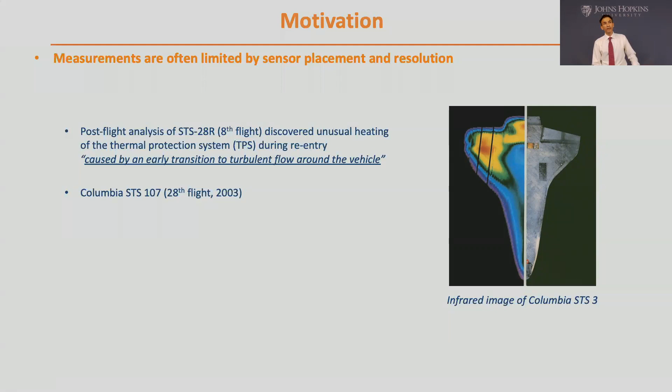Even in high-speed flows, even if you go to the lab, this is an example from an experiment at the Air Force Research Lab, where you have a cone in a high-speed Ludwieg tube, and this is a high Mach number. And what you might get from the experiment are just a few pressure traces along the cone. And this could be the only thing you get out of the experimental measurements. Perhaps you get some schlieren as well. And then given these measurements, you try to understand what the flow looks like.

Of course, the interpretation of the measurement could be as simple as saying, well, I see an organized signal here and a turbulent signal here. So transition happens somewhere between these two sensors. And if you have enough sensors, you can interpret it. But there's another perspective, and that's the one that folks from numerical weather prediction adopt. And that's that the signal is actually an encoding of the events that happened in the flow earlier. And if you can decode the signal, you can discover what takes place.

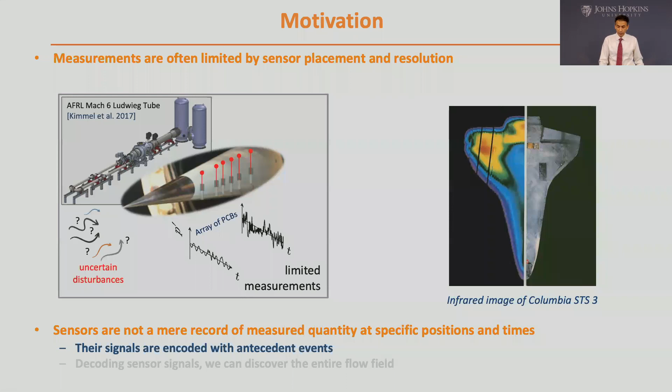And we've actually done this for the example that I'm showing here, where we can try to predict the environmental disturbances in the tunnel that we don't know. And once we have an estimate for them, we can predict the flow over the cone geometry and obtain model observations, compare them to the experiment, and continue to iteratively improve our estimate of the free stream condition until we can reproduce the measurements. Once we do, we have confidence that we're not just reproducing the measurements in our simulations, but we're in fact discovering the entire flow field. So that's the basic idea.

Now you could see applications in high-speed flows and in other areas, numerical weather prediction, environmental monitoring, interpretation of measurements and experiments. Why is this problem challenging, though? If it has such high impact, where does the challenge come from? Well, the problem is challenging because it's an inverse problem, and you're trying to find the state of nonlinear field equations from limited observations. And if the system is chaotic, any deviation from the true state will amplify exponentially. We know that. That's the butterfly effect that we all know very well.

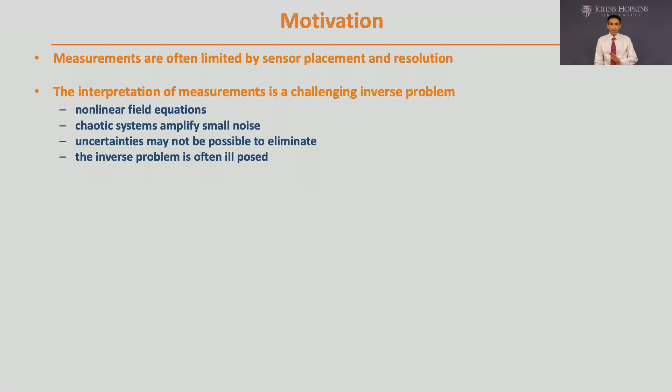How do you eliminate uncertainties? And how do you ensure that your solutions are unique? So I'll give you a very basic example, and that's the Lorenz system. Here we're showing a Lorenz system, which is in Fourier space described by three states.

X, Y, and Z. You can think of these as Fourier coefficients of the temperature and the stream function. If you start from some true initial condition, you are going to follow a trajectory, and we will observe one variable along this trajectory. We observe Y along the trajectory, and our observations are those blue dots.

This idea of chaos that we're very familiar with is that if, instead of starting at the initial condition, I only slightly perturb it, you can see that the trajectories diverge between the true, which are the gray trajectories, and red, my estimates of the trajectory. So I cannot reproduce the measurements. If the red is not overlying the gray curve, that means we deviate in forward time.

But when you're solving inverse problems, it's not just about being very good at predicting the initial conditions so you can reproduce the observation and trajectory. There's a lot more. In fact, in this case, we nearly reproduce all the observations and latch onto the trajectory for a very long time. But if you look at the initial starting point of our estimate, this is the truth here, and this is our estimated initial condition from solving the inverse problem. They're actually quite far. But even though you're far, you're reproducing the observations.

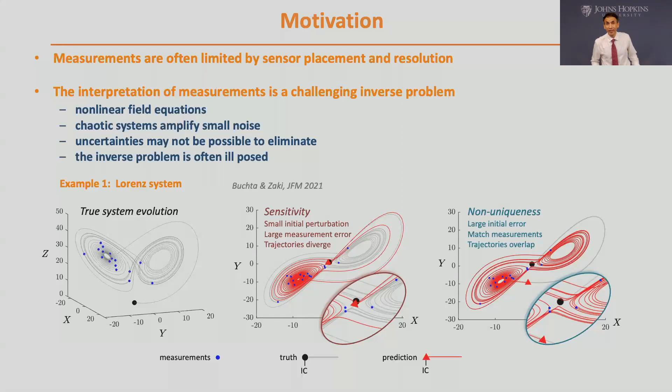Another example that we worked on is scalar dispersion. If you have a plume or a source of a scalar in a turbulent field, that scalar will disperse. And if you have a sensor downstream, that sensor will get a highly intermittent signal. If you only know the sensor signal, can you predict the location of the source? Well, your intuition tells you that this problem is very ill-conditioned.

In fact, if this were a laminar flow, you don't know whether the source is nearby and weak or far away and strong for a simple advection-diffusion equation. In fact, here turbulence is what introduces some sort of difference between the different source locations.

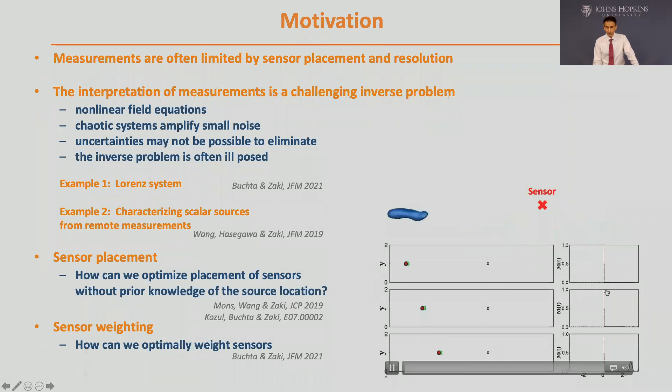To show you this visually, I've done a computational experiment where we have a fixed sensor location, and I put 3 sources further away from the sensor and change their intensity. You'll see the plume in this figure here, and a time trace of the sensor in this panel. The time traces of the three experiments look almost identical. That tells you that it's very difficult to find the true solution, because even small changes in the sensor signal can be due to significant changes in the prediction of the source location.

However, if you are able to solve this inverse problem, it really opens up a lot of opportunities in terms of understanding turbulent flows, and also to think about new enriching problems, such as how do you optimally place sensors? In this scalar problem, it turns out the optimal placement of the sensor is at the edge of a plume. If you're trying to differentiate different sources, you want to be at the edge of the plume, not immediately behind. You're not trying to maximize the sensor signal. You're trying to basically identify the edge of the plume, because that gives you a sense of how far the source is.

But there are mathematical ways to work on optimal sensor placement and optimal sensor weighting. If you have a network of sensors, how do you preferentially favor certain ones versus others? If you have scalar and velocity gradient, how do you weigh those two different quantities? So it's a really rich area.

Today, the focus will be on shear flows or wall-bounded flows in turbulence. So our basic question would be, what is the minimum resolution in the lab to be able to reconstruct all the missing scales? If I'm going to do PIV, for example, and of course today we're going to generate our data from a simulation, but if I were to do PIV and get these flickering lights, what is the minimum spatiotemporal resolution for which I can reconstruct all the missing information?

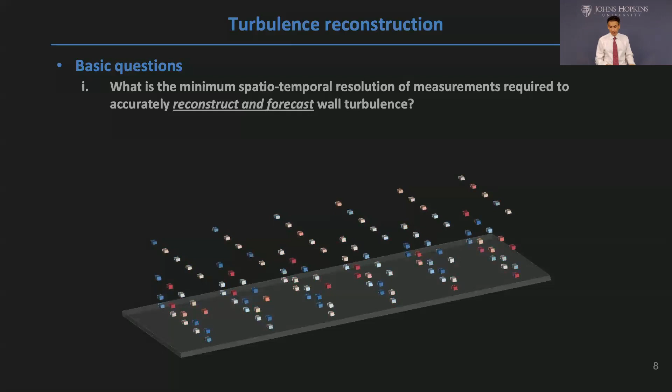And we're not interested in estimation of the information that is just instantaneous. We're interested in, one, a solution to the Navier-Stokes, and two, one that can give me a trajectory that actually follows the flow in the experiment as long as possible. So that's a very challenging task. We cannot just use simple interpolation, for example, or stochastic estimation.

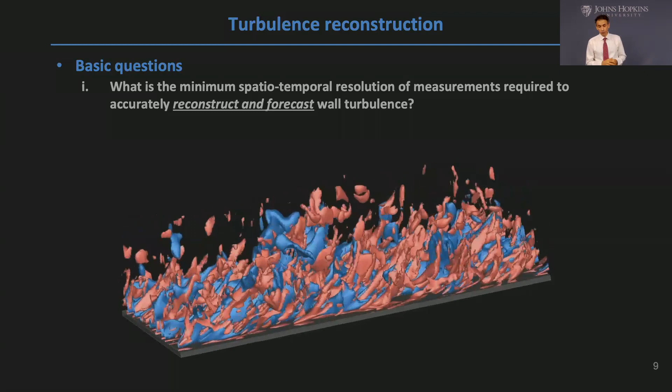We actually have to find a Navier-Stokes solution that can reproduce these trajectories. And then, of course, if we can answer this question, we can start playing games and ask, well, if I only have the outer flow, which experimentally we can measure without having to get so close to the wall, can I reconstruct the missing wall layer, which is very difficult and challenging to visualize or probe experimentally? And if I only have wall measurements, for example, that's what happens in engineering applications, how far from the wall can I predict turbulence?

And we start also discussing ideas about, if I have a single measurement, what is the domain of dependence of that measurement? What does it tell us about the nature of this inverse problem? And the approach we'll adopt is adjoint variational data assimilation. Folks from weather prediction will call this 4D-Var. And we'll first focus on turbulence reconstruction and then the idea of the sensor domain of dependence.

So we will first perform a numerical experiment and get surrogate observations. So our reference flow, that would be the experiment, we're going to call U superscript R. So whenever you see capital R, that means that's the reference state, that's the truth that will be hidden from us. And the truth satisfies the Navier-Stokes equations. And it's a channel flow configuration. And from this, we will extract some observations.

So script M here will be our measurement kernel. That's how we extract observations from the true state. And we'll extract these observations as a function of time. So as we perform this reference calculation, we're extracting observations at probe locations. And you can see this is ultimately the image that we have. And the idea is, can we see in between these flickering lights?

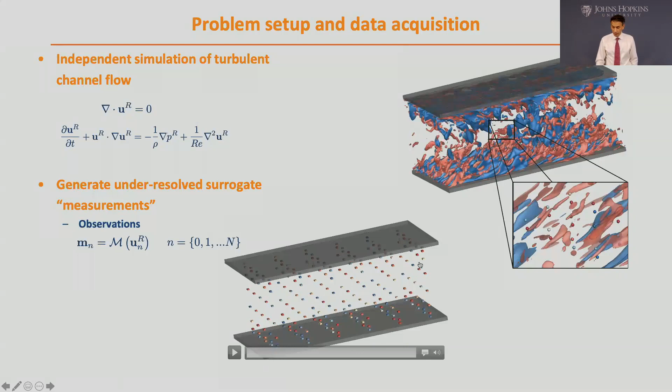So the procedure is the following. Once I've performed the experiment, I'm going to construct a numerical model of the flow. This model could be LES, it could be one-way Navier-Stokes, it could be PSE if you're interested in transition. For the purposes of today's talk, we're going to use Navier-Stokes. Our forward model is going to be called N for nonlinear Navier-Stokes equations. And if I have an initial condition for channel flow, I can predict its entire evolution.

Unfortunately, we don't know the full initial condition. This here is the control vector that we're trying to discover to be able to reproduce the measurements. However, given an estimate of U0, I can solve Navier-Stokes and I can collect model observations and I can compare them to the measurements. And I will define a cost function, which is the difference between my prediction of the observations and the true observations. So my cost function is the norm of this error term between my ability to reproduce the observations and the true observations.

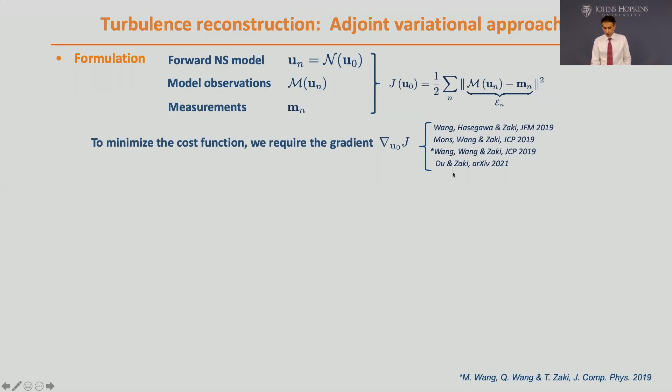The key, of course, to this minimization is to find the gradient of the cost function. And there are many different ways to do this. In our group, we've used adjoint methods, and that's what we'll do today. We've also used ensemble techniques and machine learning. So we have papers in all three areas, and we're currently doing a systematic comparison of the performance of the three.

So the idea of adjoint variational methods is that given an estimate of the initial condition, I can solve Navier-Stokes and collect my model observations. I can compare them to the true observations here and find the errors in my reproduction of these measurements. And that's E sub n. And I also have to store the forward velocity evolution, and we'll see why. Once I get to the end of the time horizon that I'm assimilating information, I solve the adjoint equations. So these are the dual to the Navier-Stokes equations.

And you can see the adjoint will be marked by a star. And you can see also that the adjoint Navier-Stokes equation on the right-hand side is forced by the disparity between our prediction of the measurements and the true measurements. So this disparity is what drives the adjoint equations in backward time. And at the end of adjoint marching, what we have is the gradient of the cost function. Once I know the direction of the gradient, how the cost function increases, I can move in the opposite direction and attempt to reduce the cost function.

And we do this iteratively. The reason for storing the forward flow field is because the adjoint equation depends on the forward flow field. So you have to store the forward evolution during your assimilation time window, and you use it in the adjoint system. So I'll show you results now from this procedure for turbulent channel flow.

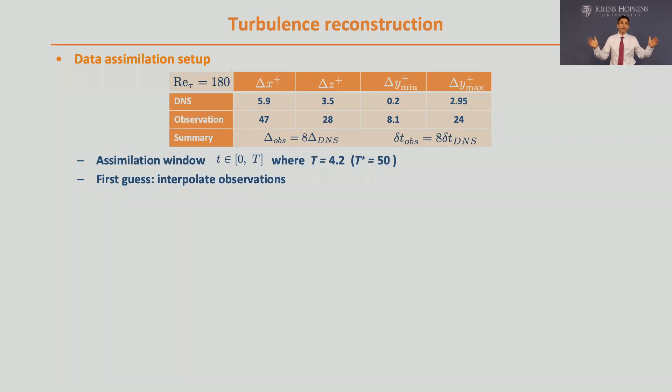The first example is from Re-tau 180, and we perform DNS. This here is the DNS resolution on the top row, and below it is the resolution of the first set of observations we'll look at. So as a first step, we said, imagine we cannot perform measurements at full resolution of DNS. We can only perform measurements that sample roughly every 8 times the DNS resolution. So delta X of the observation and Y and Z is 8 times what you would need for DNS. And in time as well, we're subsampled. Our assimilation time horizon in this case is 50 plus units.

And the first result that I want to show you is just visual, qualitative. This here is the hidden truth calculation. And below it is a reconstruction of the initial condition when the resolution is 1/8 in space and time. So 1/8 to the fourth is over 1/4000 of the true resolution. And if you play the 2 videos, you can see our ability to reproduce the reference flow. I will show this again. You can see our prediction of the initial condition. That's the objective, or the control vector that we're trying to assimilate. Our prediction seems reasonable. It has some high frequency noise, but as it evolves, it improves and latches onto the true trajectory and reproduces the experimental measurements.

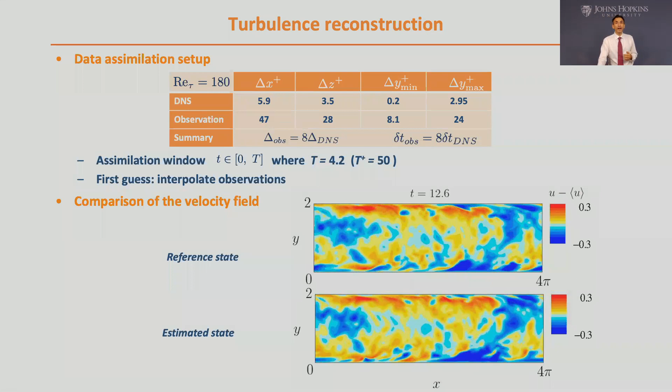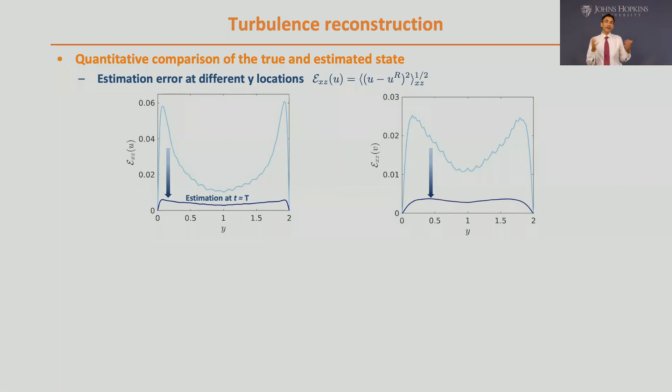We can quantify the error. We can integrate the error in the horizontal plane and plot it versus wall normal coordinate. This here is the error in the U component of the velocity as a function of distance from the wall at the initial time. So this is the error in the initial condition that we predicted, and this is in the V velocity. And as we march this predicted initial condition forward, you can see that the error decays. It doesn't diverge as you would expect from the fact that the flow is chaotic. In fact, the error decays. And there's an obvious question, why does the error decay? So we can plot the integrated error. I integrate the error in Y and plot it versus time, and you can see indeed it's decaying in time.

Well, the reason the error is decaying is because this forward adjoint loop is targeting the observations, minimizing the error in the observations. But which errors are most important in this loop? When you solve the adjoint equation, it is forced by the discrepancy between the true measurements and the model reproduction of these measurements. At the final time, the errors have an entire time horizon to amplify within the adjoint. But the errors at early times have a smaller duration being advanced by the adjoint. So if you think about this idea of dual chaos, or the Lyapunov exponent of the adjoint equation, you realize that the latest errors are the ones that have the longest time in the adjoint equation to amplify by the Lyapunov exponent.

And the target of this forward adjoint loop is to find the initial condition that reproduces the measurements, but it's really targeting the latest measurements. So if you wanted your error to be almost uniform in time, you can weigh the measurements and maybe have a decaying weight to say, actually, I want to also be able to reproduce early measurements accurately, and we've done that.

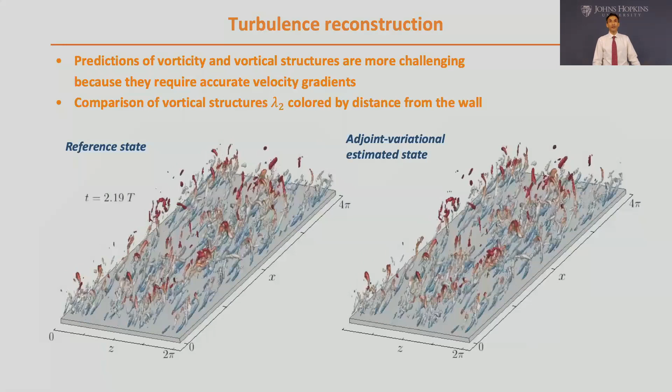But if you were to perform the data assimilation procedure, you get a richer picture. Again, it's noisy because we have all these high-frequency errors in the initial conditions. But as we march our predicted initial condition, you can see that we're capturing these vortical structures. How sensitive is our prediction to noise? If the measurements have some white noise, how well can we reconstruct the flow field? So here I'm looking at the errors in our prediction of span-wise vorticity.

And if I add noise to the data, 0% noise, that means I have perfect data that come from the reference calculation, and our error in the vorticity is this lowest gray line. And if I systematically add noise to the measurements, we added 5%, 10% noise, and you could see it's this line here. We're still less than 5% error. So the error in the vorticity field is lower than the noise level we added to the measurement.

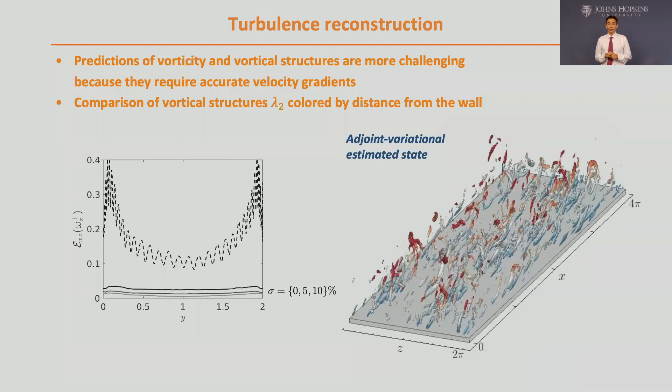This here is the error in your prediction if you use just simple interpolation. So you can see you have 40% error in vorticity if you just use the original observations and interpolate. So now we start thinking about, we can do this reconstruction, but what are the limitations? We only took 1/8 of the DNS resolution for our observation. What if I keep coarsening systematically the observation? What is the length scale that matters in our ability to reconstruct the flow?

So we systematically change the distance between span-wise measurement locations. And of course, at ZM is my measurement location. At ZM, if I compare my prediction and the true flow, they're very accurate because I have data on this plane. And we can see that because in color, I plotted the true flow, and with the lines, I plotted our estimation of this hidden truth. When the lines and the colors overlap, that means we've done a good job.

If I move away in the span from a measurement location and look at how well we predict the flow, now you can start to see that the lines and the colors are not aligned. It means our predictions are not matching the true flow. And we systematically change the distance between span-wise measurement stations and check how the error looks. So here we're plotting the actual errors, and this here is the distance between two span-wise locations. So if we're only measuring every 112 plus units in the span, or 56 or 28 or 14. So we're progressively bringing the measurement stations closer together.

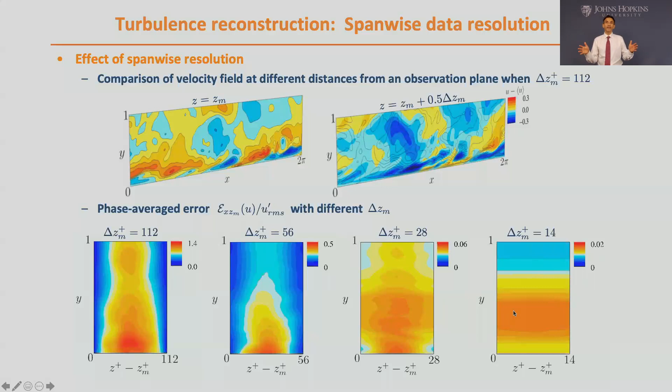And you can see when they're far apart, the error, of course, is lowest at the measurement location, increases, and then decays again. And here, this is very large error. This is 140% error. But of course, as you bring them closer, your error drops. We're down now to 2% errors. And it's homogeneous because the stations are close together. But what is the critical resolution?

Well, we can plot a correlation between the true flow and our prediction. So this is the lower correlation here. At the measurement station, the true flow and our prediction are perfectly correlated. And as I increase my distance from the measurement station, the correlation, of course, decays. My prediction of the true flow becomes poor as I move away from the measurement station. This figure, of course, reminds us of the two-point correlation, but they're not exactly the same. Remember, in the two-point correlation in turbulence, we take a reference point and move another point away from it and see where the flow decorrelates.

But the point of plotting these two together is to tell you that even though the turbulent structures, for example, at y plus 17, have entirely decorrelated by 28 plus units, the correlation is 0. My reconstruction of the flow 28 units away from the measurement station still is correlated with the true flow by 50% correlation. Again, if you go higher up at y plus equal 51, the flow decorrelates by 56 plus units. But if I'm 56 plus units from the measurement station, I have 50% correlation between my prediction and the truth.

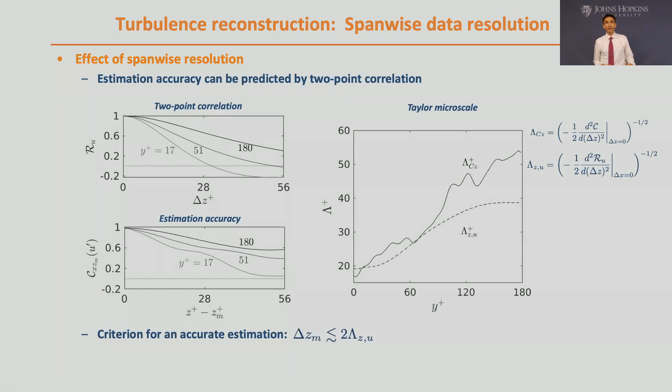So once you look at the correlation, it tells you, okay, you can from here get a length scale. And this length scale is a Taylor microscale that tells us basically the decay rate of your correlation. And you can see here, this is our Taylor microscale versus height. And this curve is the Taylor microscale. And this here is the microscale that we define that says, if your spacing between measurements is smaller than this lambda c, you can reconstruct the flow accurately. And you can see that they are similar values.

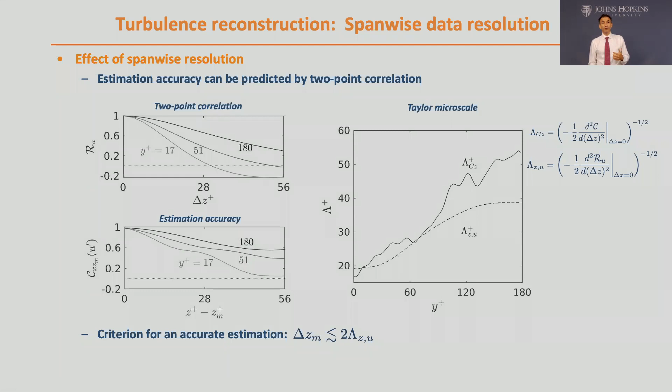So the argument here is that if the measurement stations are within a Taylor microscale, you can accurately reconstruct the missing information. And by accurately reconstruct them, we're not just using a correlation, we're looking at the flow being correlated with the true state above 90%.

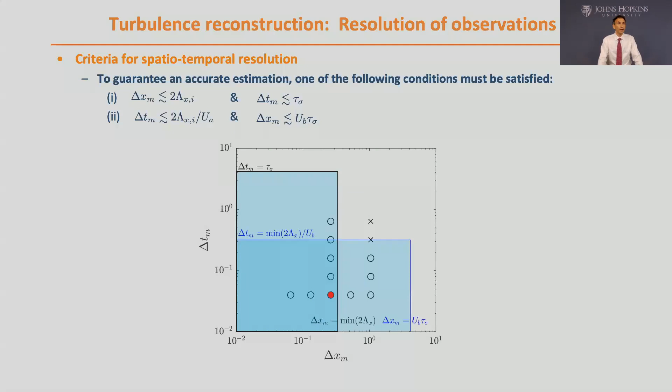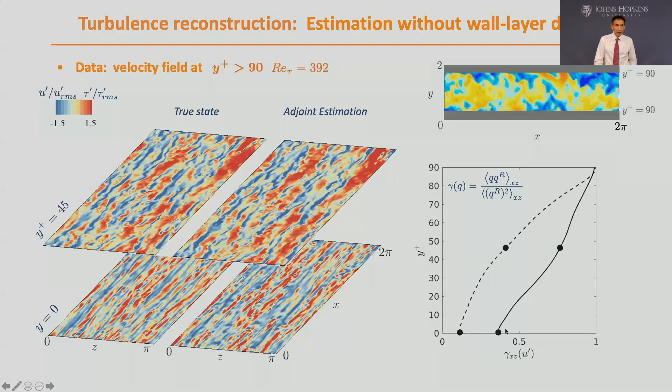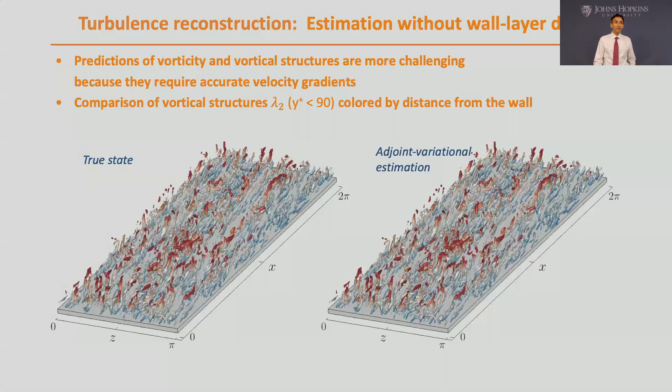And then we went to the biggest challenge, and that's just starting from wall observations only. There's nothing else. We only have information here at this red line, and the channel is entirely dark. How far from the wall can we actually predict the flow? So now we have to change our cost function. It's now the stress at the wall. That's the information that we have. And we try to reconstruct the flow.

So this is the true state, and this is our estimation. And you can see here, we're very close to the wall at y plus is equal to 15. We can reproduce the true flow. And our correlation coefficient with the truth is close to 1 at y plus less than 10; at 15, we're maybe at 90%. And you can see there are many curves here. These are Reynolds numbers from 100 to 590. So we've done this exercise for many Reynolds numbers.

And then we move up from y plus 15 to y plus is equal to 100. At this point, you see the correlation has dropped down to about 60%. We're still getting some of the larger scale motions, but the finer scales are more difficult to identify. And then we go even higher. This is y plus of 300. And then we're basically only predicting the large scale motions. We're not predicting anything else.

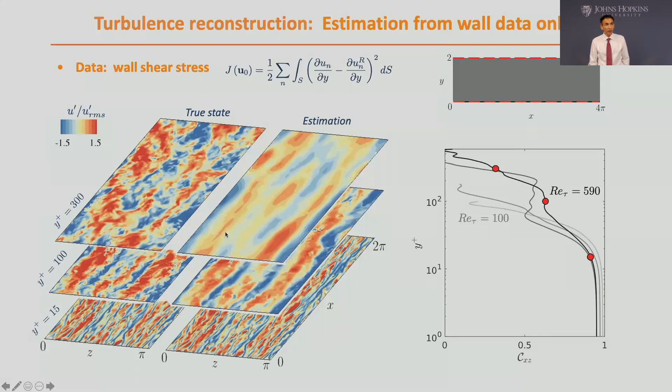How well is our prediction near the wall? We look at the true state and the estimated state, and we have interest in strong ejections and sweeps that happen near the wall and the associated high stresses and low stresses at the wall. We've written a paper with Greg on the Lagrangian stochastic behavior of vorticity, or Lagrangian stochastic Cauchy invariance for vorticity, about these events. And you can see the true is in black and our reconstruction is in gray, and the vortex lines are perfectly reconstructed.

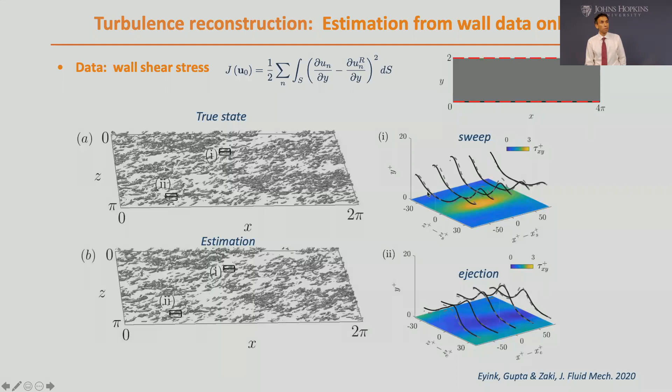Every measurement, what's the domain of dependence of that measurement? How does it affect the cost function? What is the shape of that cost function? So all these questions are the focus of the second half of the talk.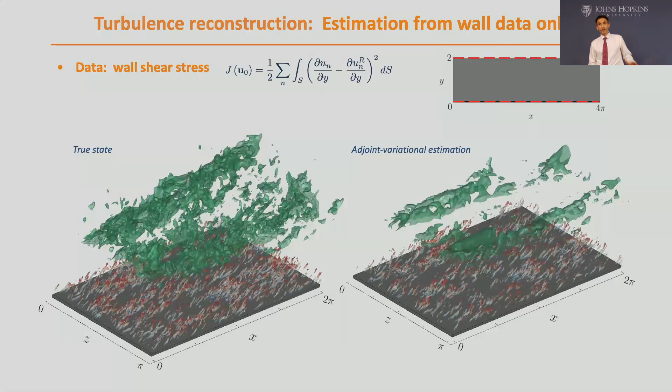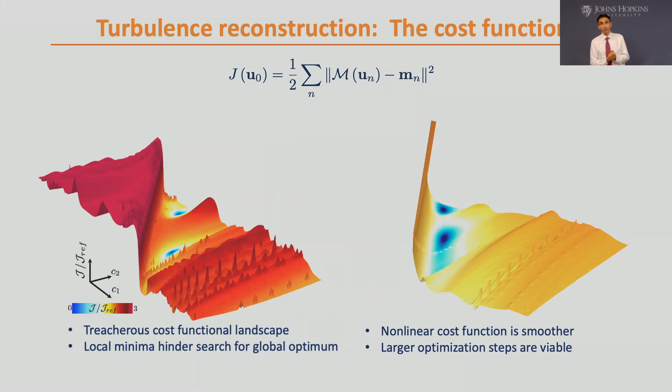If I weigh the measurements, the cost function will change. And you want to have a sense of what the cost function shape looks like. You can see it's a treacherous landscape and it's full of local minima and maxima. If you change your measurements or if you weigh them, you can change the shape of the cost function. This here is an example where we weighed the measurements to be able to favor ones that give you a

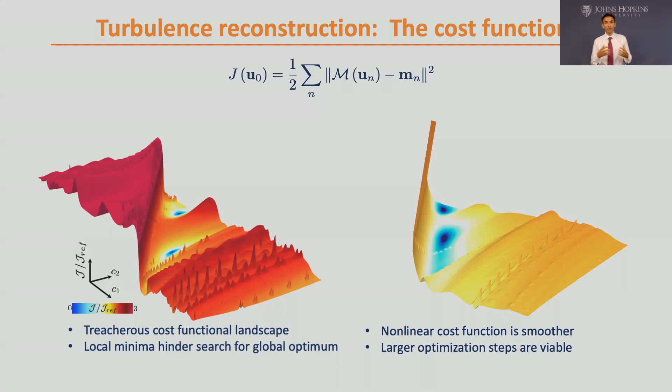smoother landscape. But before you do any of this, you first have to understand what is a measurement kernel, or what is the domain of dependence of an isolated measurement, before you get a sense of what the cost function looks like. So the second half of the talk will focus on this landscape of the cost function.

So if we think about these wall measurements and how we can interpret the flow field, the cost function is a measurement of the shear stress at the wall, so du/dy, that I am predicting from my estimated initial condition, versus the truth. And if these are far apart, then the cost function would be large and we're trying to drive it to 0. So the convergence depends on the landscape of this cost function.

And we want to understand that landscape, but where should we try to understand the landscape? If I put the initial condition anywhere, it's not necessarily a clear indication. Your choice of initial condition could be arbitrary. It gives you the landscape only at that location, and my initial guess and yours might be different. So it's instructive actually to look at the shape of the cost function at optimality. If you're so good that you're approaching the optimal, or you're even right there, what is the shape of the cost function there?

This also simplifies the problem because at optimality, the gradient of the cost function is 0, and the only thing we care about is the Hessian, the curvature of the cost function. And if you have a cost function which is essentially flat, that means your Hessian has practically no curvature and it's very difficult to invert, and you won't be able to necessarily identify the optimal. The system is very ill conditioned near the optimal. And if you have high curvature, that means you have strong sensitivity near the optimal, and your adjoint variational algorithm will drive you towards the optimal.

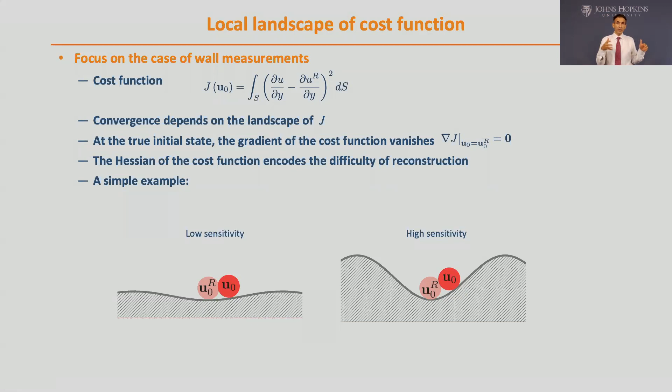So because we're going to look at the location of the optimal, this really simplifies the problem in very nice ways. Instead of looking at my estimation minus the truth, I can define a perturbation U prime, which is the difference between those two. And I call it an error or perturbation because we are at the optimal. I can linearize the equation around the optimal, and I can find that U prime, the deviation from this reference flow, is governed by the linearized Navier-Stokes equations.

So if I start with an initial perturbation, I can ask myself, how does it evolve? And it follows the linearized Navier-Stokes equation. So this perturbation will evolve according to the linearized Navier-Stokes and tells me how the cost function is going to change. Note that the forward Navier-Stokes, even if it's linearized, still has the true forward flow, which is a fully turbulent channel flow and chaotic. So we haven't thrown out chaos.

If you look at the evolution of U prime in this video, we start with U prime, which is random noise, and you can see it evolves. We are multiplying it by e to the minus lambda t, and lambda is a Lyapunov exponent. So to keep it order 1, we're multiplying it by this decaying exponential, because in reality, its energy is growing like e to the 2 times the Lyapunov exponent times time. So chaos is still there. This U prime is still chaotic. So your forward butterfly is still there,

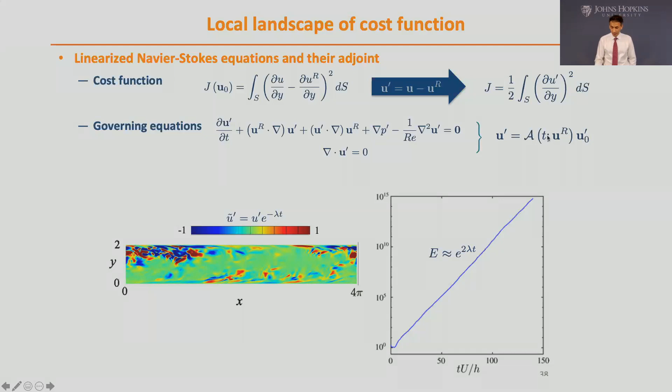here in linearized form. And then if I have a perturbation, I can compute how the cost function changes. We know the gradient is 0. I can compute the Hessian by taking successive perturbations and compute the Hessian of the cost function.

So in reality, if I want to figure out how the cost function changes, what I would do is I will take a perturbation to that true state, and I solve Navier-Stokes as I just showed you, the linearized Navier-Stokes, and then I will extract measurement from the outcome. The outcome is U prime, and I take a measurement, and that gives me du prime dy.

This is a very expensive process. For every possible initial perturbation, you have to solve the linearized Navier-Stokes and take measurements. This procedure would be very costly. You have to perturb U, V, and W, and pressure at nx by ny by nz points to be able to compute the Hessian of the cost function.

Or you can recognize that you just can take the adjoint. So you move A from here to the left-hand side of the bracket. So now we have an adjoint equation, adjoint linearized Navier-Stokes, acting on the measurement kernel. So this here is the measurement kernel. This is the shear stress computation, the d/dy at a point. And the adjoint field that comes from that is U star.

Once you have this adjoint field, so we start with the measurement kernel, M, and we solve the adjoint equation, A star times M, that gives me U star. This adjoint field, you can compute it once, and for any initial perturbation that you can dream up, you only have to compute a dot product, and you can find the cost function, or du prime dy, which is your cost function.

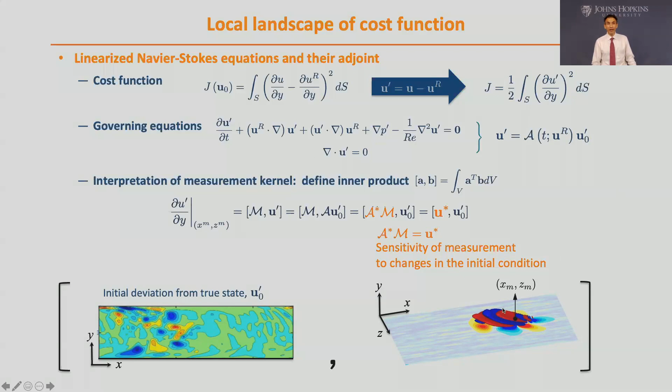So the adjoint field is really the domain of dependence. The adjoint field starting from this kernel is the domain of dependence of your measurement. What's beautiful about it is we've computed it for different Reynolds number for shear stress measurement at the wall, and we compute this adjoint field at different backward times, and you can see it's spreading and growing. It looks like a spot, a turbulent spot. Those of you that worked in transition would know this, that is spreading in backward time upstream.

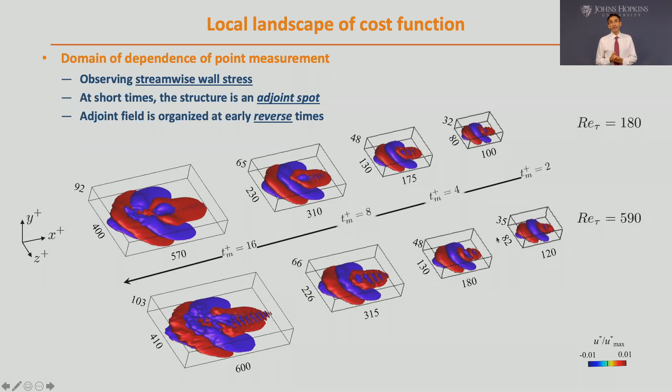So this measurement was affected by a small region earlier in time, a bigger region upstream earlier in time, and even further, it's a bigger region. And if you compare different Reynolds number, you can see the similarity between the adjoint fields in plus units. So the plus scaling, viscous scaling still works in the adjoint field.

You can compare the adjoint field due to measuring streamwise stress, spanwise stress, or pressure at the wall. And you can see that, for example, the streamwise stress, this is the U adjoint field. So if I have a positive U perturbation here, it will have a positive impact onto the streamwise shear stress. But here you can see the spanwise shear stress, a positive U perturbation or a negative U perturbation on the other side of the sensor will both have the same spanwise shear stress at the measurement location and measurement time.

And you can see the adjoint pressure is larger, which is consistent with our view of the pressure being non-local. So you can see the domain of dependence of the pressure sensor is larger than that of spanwise or streamwise shear stress.

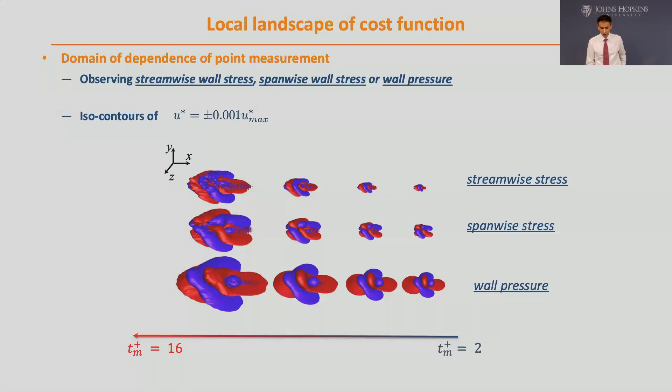So how do we get to the Hessian from here? Well, now I can rewrite my cost function in terms of this expression that we just derived, the adjoint field times any initial condition. So now I can take the gradient and the Hessian of the cost function with respect to U naught, the initial condition, directly. I don't need to do forward calculations and take measurements to figure out how the cost function that depends on the final state is sensitive to an initial condition. I can now directly take the derivative with respect to the initial condition, and you can take it twice,

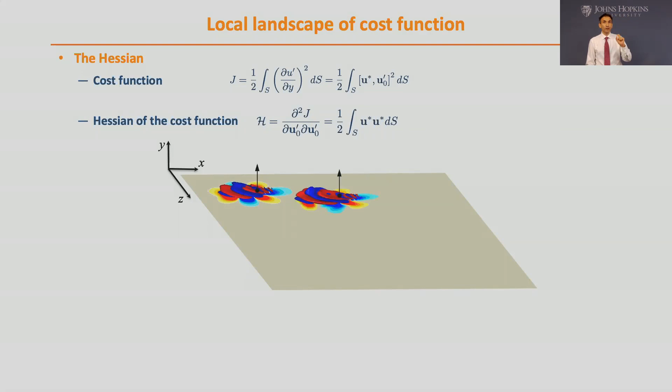and you can find that the Hessian is actually the cross correlation of the adjoint field. So it's this matrix, which is U star, U star. People in control theory will also call this the observability gramian. So I can compute it since the wall is homogeneous in the streamwise and the spanwise direction. I can do this kernel calculation at different positions along the wall, and I can ensemble average them, and I can find the ensemble average Hessian, and that would be U star bar.

And because also of homogeneity, I can take advantage of Fourier transform, and I can write it in terms of every kx and kz wave number. And in Fourier space, it will just be a multiplication, instead of a convolution, of U star, U star. So now I can construct this Hessian, and I can look at how the shape of the cost function looks like for every kx, kz that we're trying to optimize in the initial condition.

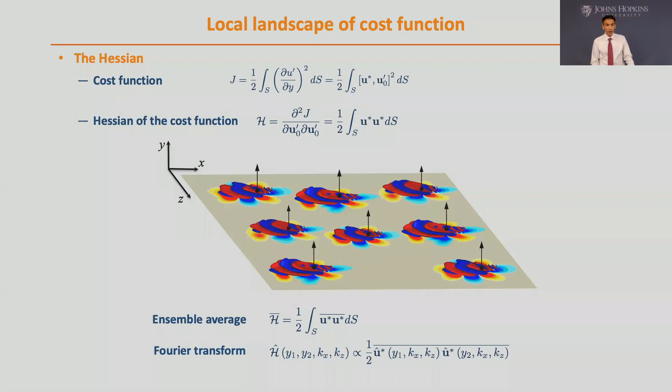So we do this for measurement horizon, which is 4+ units. So if you only have a measurement and you only want to predict what happened 4 time units earlier, I can plot the eigenvalues of the Hessian as a function of kx+ and kz+. So for every wave number pair, I can say, how well can I reconstruct the initial condition for a given wave number, kx+, kz+, 4 time units earlier.

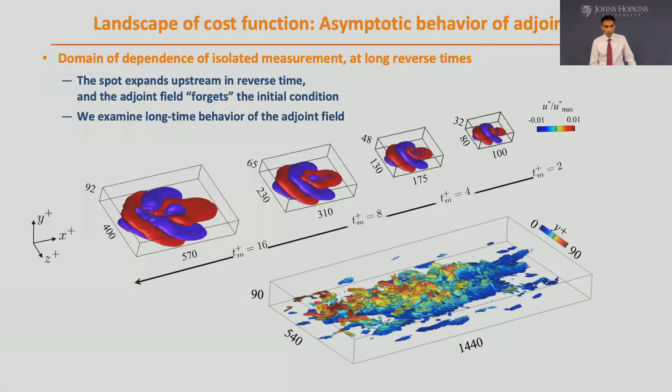So for people from transition, this is very close to home. These are spots propagating upstream in backward time, and they look like turbulent spots. And if you wait even longer, the adjoint field forgets its initial condition and just becomes a chaotic adjoint field. So we can compare the chaos of the forward system. This is the forward linearized Navier-Stokes, and this here is the adjoint of that equation. And we can compare the chaos in both of them and have a better understanding of the forward butterfly effect, but also the adjoint butterfly effect.

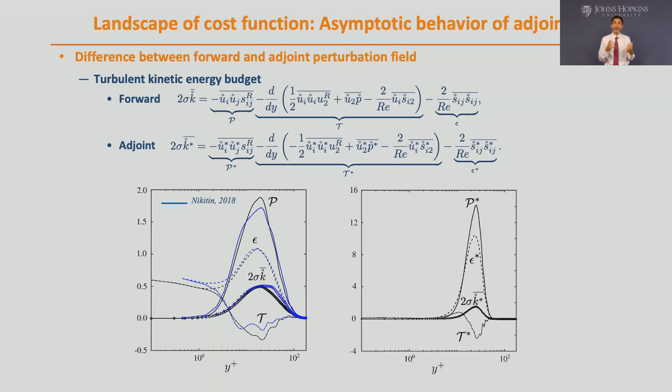And that's why the reconstruction from wall observations is very good below the buffer layer, deteriorates in the buffer layer, and then you get this filtering effect where you only reproduce the large scale structures in the outer flow, but not the details of the turbulence because of this chaos that takes place that is mainly generated within the buffer layer.

Okay, so just to summarize, the basic question was, what is the minimum resolution? And I hope the takeaway from the talk is the Taylor microscale and the Lyapunov timescale are the two most important elements. Can we use measurements of the outer flow to reconstruct the near wall region? We've demonstrated it, and we're now trying to establish bounds on how well you can do LES wall modeling using these techniques. And if you start from the wall, can you reconstruct the flow?

Well, you can reconstruct it up to the buffer layer, but then the reconstruction quality deteriorates. We outperform any algorithm out there with adjoint variational methods, but once you hit the buffer layer, you have to take a penalty in your correlation to the truth.

And what is the domain of dependence? We talked about this adjoint kernel, and the spot that grows in reverse time, and the features that we can reconstruct most accurately, for a long time, or for T+ of order 20, start to become the leading POD modes. But of course, it's difficult to converge in other directions where you have weak sensitivity.

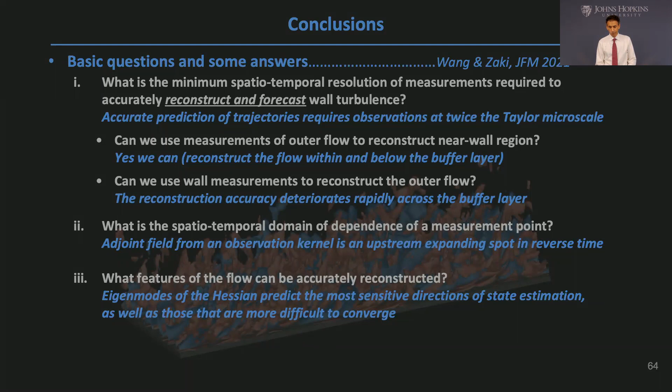So I was wondering, when you have the forcing to the adjoint equations, presumably the adjoint velocity field is defined on your fully resolved grid, but your discrepancy measurements are defined on the grid in the measurement space. How do you deal with the difference in the grids between where you know the measurements and the full grid where you're solving the forwards and adjoint Navier-Stokes equations?

So currently we're computing these errors at the discrete locations where we have observations, and the forcing only appears at those points, but the adjoint equation is solved everywhere. So we're not using a kernel; for the errors, it's basically enforced at a point. In reality, of course, when you get measurements, they're not going to be point measurements as we do here.

For example, in the work we're doing on high-speed flows, the PCB sensors for wall pressure have a finite size. So then there's a kernel for the averaging of the pressure signal when you do the PCB measurements. And then in our computation, because we're trying to reproduce the experiment, we have a region, a collection of points over which you have the observations at every sensor. In this case, because the observation came from DNS isolated points, we can use the same thing. But in reality, we try to model the actual probe. I hope this answered the question.

Thanks, yes. Phil, do you mind if I ask one more question? Yeah, go ahead. Are any of the reference measurements purely velocity, or do you also use pressure? So for volume reconstruction, we're only using velocities. For reconstruction from the wall information, sometimes we use the stresses and the pressure. But for all these volume reconstruction results, we're only using the velocity. We didn't assume knowledge of the pressure. In fact, the pressure is another outcome of that reconstruction, which is a nice thing to be able to do for our experimental colleagues. Absolutely, thank you.